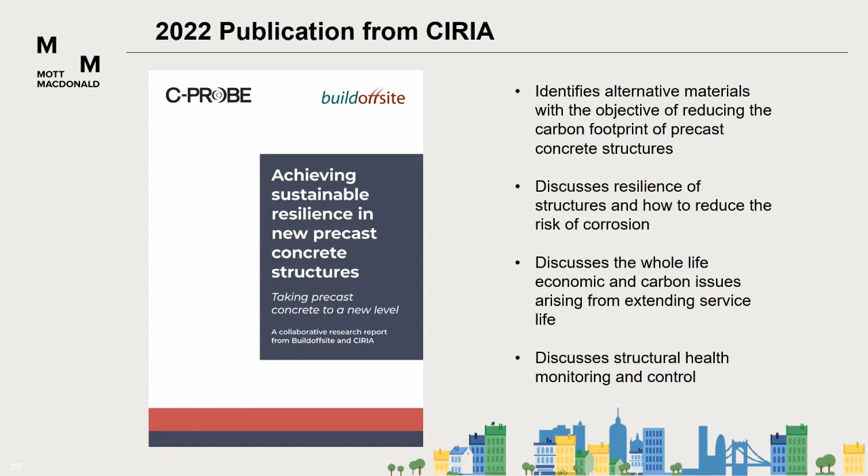Firstly, a bit about embodied carbon. A lot of people talk about it. There's carbon figures bandied around all over the place, but it can sometimes be missed as to what it actually is. So when you make something, anything at all, you use energy, and the more complicated it is to make, the more energy you use.

Most of that energy comes from burning fossil fuels. When you burn fossil fuels, you release carbon dioxide and water. The fossil fuel itself is a long-term carbon store. So all this carbon dioxide is extra carbon dioxide that's reintroduced back from dinosaur times when it was nicely locked away as oil and gas.

We then make something, it's processed and transported to where it's going to be used. That uses more carbon dioxide. In addition to the fuel that we use, the tricky thing about cement, Portland cement, is we burn limestone, and that physically releases carbon dioxide as part of the process. So that's one of the reasons cement is seen as positively evil from the point of view of greenhouse gases.

As an example, if you take a linear metre long column that's 250 by 250, including the reinforcement, 40 years ago - well, actually probably 60 years ago - we'd be using straight ordinary Portland cement mixes, and that would be 77 kilograms of carbon dioxide equivalent per linear metre of column.

If we take 30% of the cement and replace it with pulverised fly ash, a waste industrial product from burning coal, we got that down to 56 kilograms. And if we use 70% ground granulated blast furnace slag, we get that down to 35 kilograms.

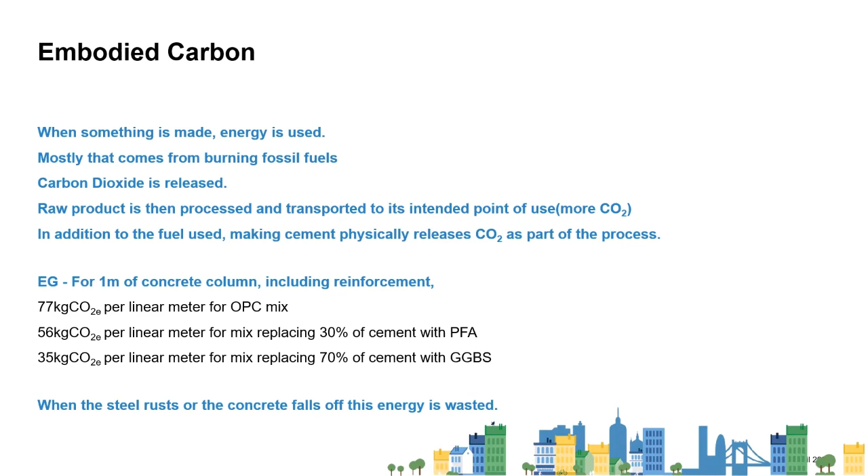The other problem with corrosion is that it's a perfectly natural phenomenon. Steel doesn't want to be steel. We stuck a lot of energy in it to make it steel, and it wants to turn back to rust. When it rusts, concrete falls off. We also lose structural properties - we lose section. So as well as the bits of concrete falling on people, we're losing structural capacity.

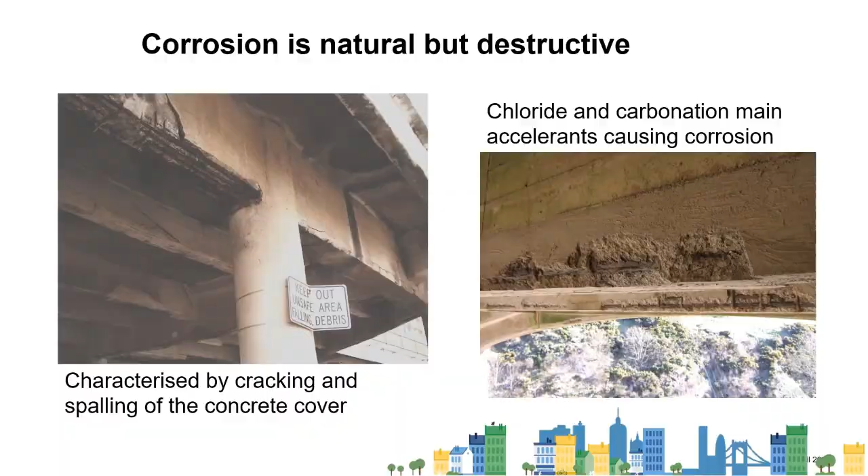As Kat mentioned, 7 to 8% of carbon dioxide emissions in the world are the result of Portland cement production. Now that's an appalling amount, but if you look at the actual use of cement by mass, 52% of the stuff used in the world is concrete. So it's not so much that cement is bad, it's just we're building a lot of stuff.

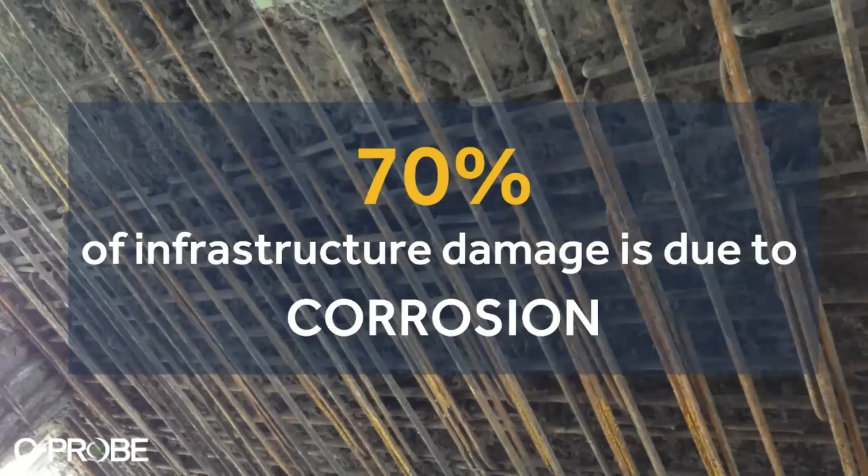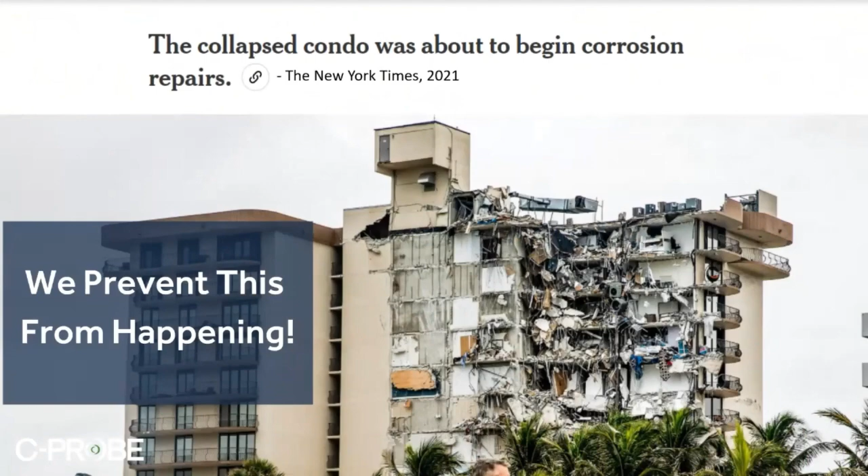70% of the damage on infrastructure is due to corrosion. And sometimes, if you let it corrode and don't keep an eye on it, really bad things happen. This is the condo that collapsed in Miami in 2021. Repairs are about to happen. It's all very well sitting there pointing and going, yeah, but that was America, we're different over here. No, we have collapses over here too, due to corrosion.

So we need to make durability better. The conventional approach to making more durable structures so that we don't waste all the energy we've invested is to stick more cover onto the concrete or more cement into it. Both of those just mean more carbon dioxide, and it's been the historical approach that's been undertaken, and that has led to a significant industry repairing it. So it's not entirely perfectly reliable.

One of the things we do to steel all the time to stop it rusting is coat it, but we tend not to do it to concrete. We can work out the figures for coating concrete - it's about 2.7 kilograms of carbon dioxide per square metre per application, and we might need to do it again and again. The difference with concrete versus steel is when the coating falls off steel, it starts corroding instantly. With concrete, when the coating falls off, you've still got a protective barrier of concrete, so you can plan your maintenance based on what's actually happening.

Graham's going to talk in more detail about cathodic protection. There's a range of options. We can either make it easier to cathodically protect in the future - join all the steel together and make sure it's electrically continuous. That means we're going to have no additional CO2 until it's needed.

We can include anodes and monitoring so we're watching to see when the corrosion started, and we can turn it on when the corrosion started. That's about 3 kilograms of carbon dioxide per square metre, plus the power supply when we need it. But these are all extra low voltage, tiny current systems. Or we can stick cathodic protection on at day one, which uses lower current to prevent corrosion rather than to stop it once it's started.

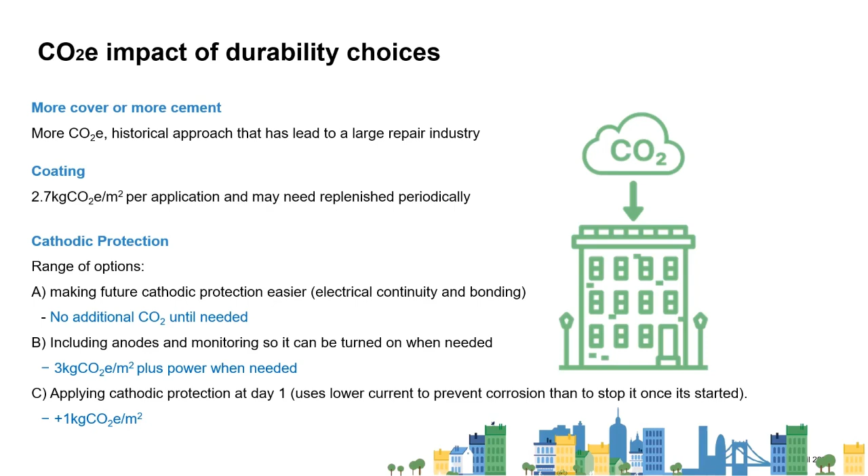As an alternative to achieving durability, the alternative to using Portland cement is the use of alkali activated cementitious materials, and Graham's going to take it over from here.

The guide does focus a little on alkali activated cementitious materials as an option for low carbon cement binders. That doesn't mean to say other efforts aren't out there trying to lower that carbon, as Chris outlined. But the use of AACMs uses an awful lot of the secondary cementitious materials. What I want to focus on here is how we've used these materials to focus in on the resilience aspects of construction.

What I would add is the evolution of this PAS 8820 in 2016 has seen the formation of the Association of Alkali Activated Cementitious Materials, or A3CM, which I'm a founding director of. That organisation is currently focused on drafting engineering specifications for using these materials, which we hope to distribute to the industry next year.

One case study - this is actually in restoration, not in precast, but the principle is the same. As Chris alluded to, if we allow steel to corrode, we're losing all the embodied carbon that's within that structure if it reaches demolition.

And this case study is a current job of C-Probe's in New York, which we're doing in conjunction with Mott MacDonald. It is made up of 3 podiums to support a parking structure, some apartments, a multiplex cinema, etc. And it was allowed to degrade over time, not probably by choice, but just by budget.

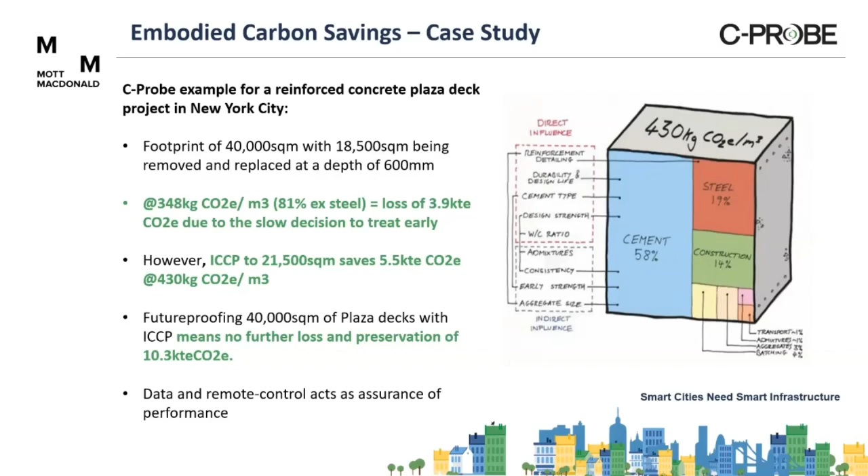And the good thing about cathodic protection systems is you get data. It's part of the ISO 12696, which is now the 2022 version. And we can design in these systems in order to be remotely controlled, fed from that decision making from the data that's achieved. So performance is assured into the future for decades to come.

So if you like, it touches all sorts of buzzwords at the moment, prop tech and infratech and insurtech, etc. With clean tech technology, if you're taking industrial wastes, repackaging them as a clever, smart binder in order to be able to pass current through it, we can automate, streamline, and take the building, or the structure, or piece of infrastructure, and build that to last with some resilience into the future.

The upshot of this, and these are not C-Probe's figures, these come from the NACE Impact Report in 2016, the use of control systems saved approximately about 3.4% of GDP of a Western industrialized nation. So it's not insignificant. To give that some US terminology, Congress has just put out $1.2 trillion worth of infrastructure spend, and they can actually save $850 billion per annum by adopting control systems. So not surprisingly, in July last year, Congress announced a $200 billion spend just on control systems of infrastructure. So the market has just improved.

And this actually has an ESG impact. Kat alluded to this earlier on too. There are big gains in the net zero landscape for ESG impact. And in the case of adding cathodic protection from day one, then environmentally we're repurposing all these industrial wastes in order to produce components that allow us to integrate into the structure and take control from day one. So environmentally a very useful thing to do.

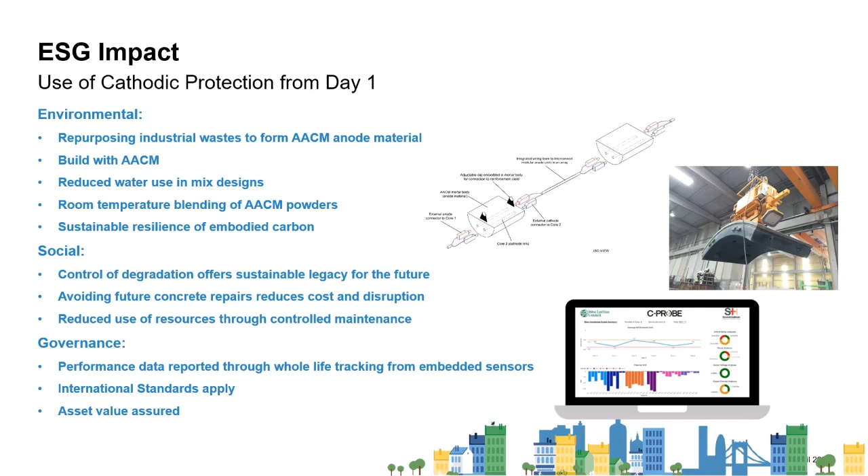And in the governance sense, we're applying international standards, producing performance data, reporting that, tracking that on embedded sensors and remotely. Really the good news for owners and for the taxpayer is that asset value is assured by taking that control. Now, we actually have a little video of the modular anode unit, which is a componentized version of an anode that can be inserted straight into, or connected straight into, the rebar during construction, allowing us to control from day one.

So let me just run this.

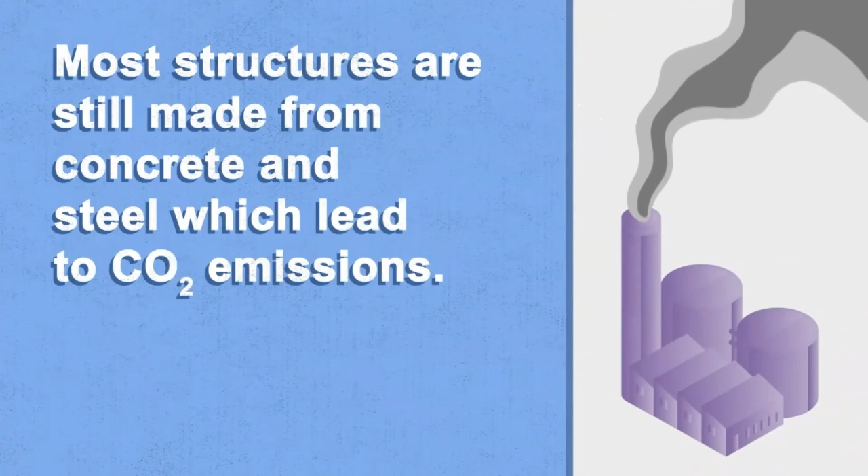Most structures are still made from concrete and steel, which leads to CO2 emissions. Climate change is currently a huge threat to the built environment, causing high temperatures which accelerate carbonation and corrosion to reinforced concrete infrastructure. C-Probe is addressing the challenges of raising the resilience of reinforced concrete with its new low-carbon technology, the LOSEM Modular Anode Unit.

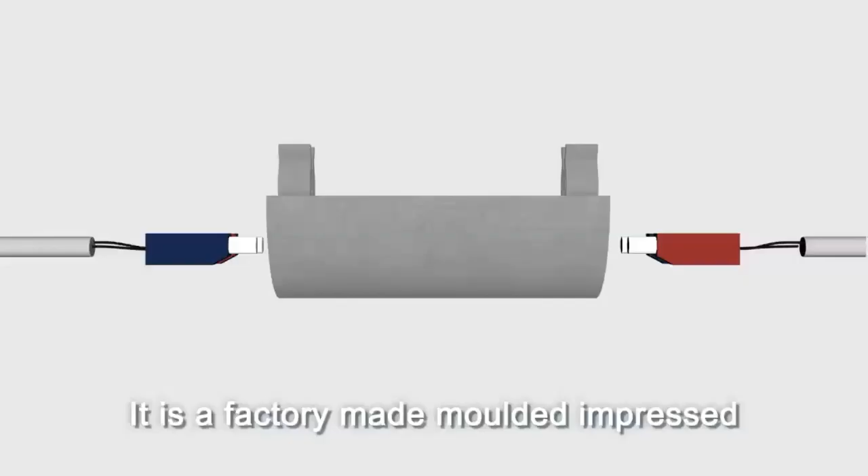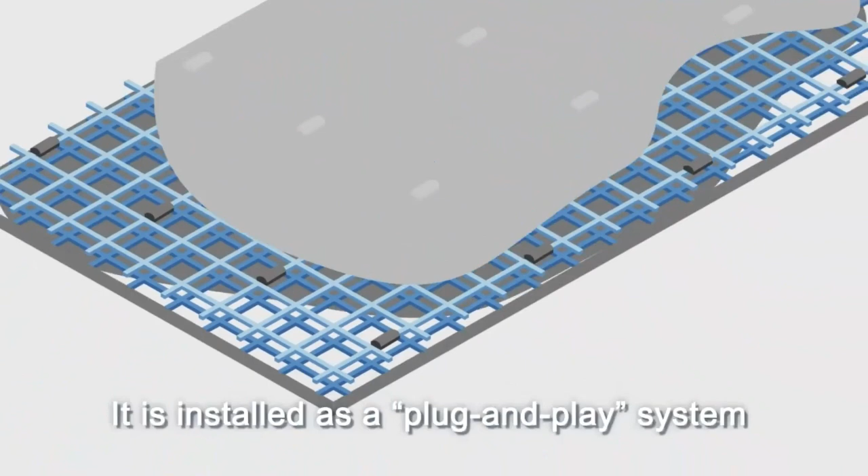What is the LOSEM Modular Anode Unit, or MAU? It's a factory-made, moulded, impressed current cathodic protection component that can be attached in an array directly to steel reinforcement prior to pouring the concrete. It is installed as a plug-and-play system with tailored current densities providing long-term sustainable structural resilience and control over steel corrosion.

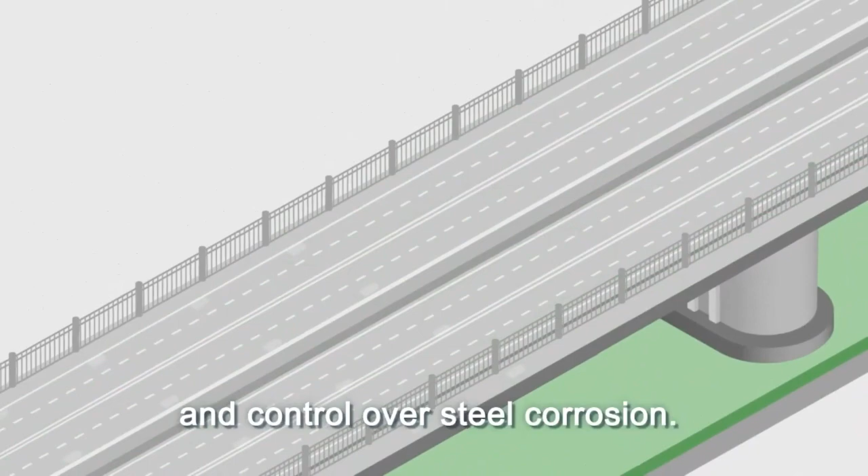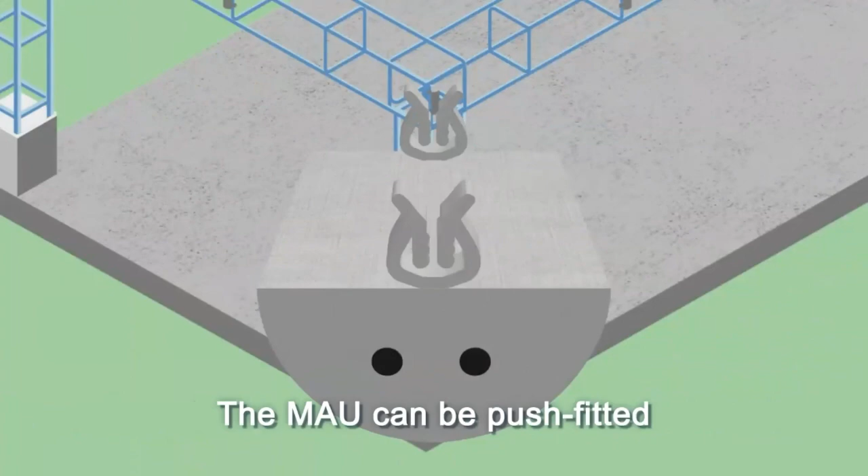Easy to install, for all new construction where reinforcement steel needs protection from future environmental impact. The MAU can be push-fitted to a range of steel diameters during steel construction. Plug and play.

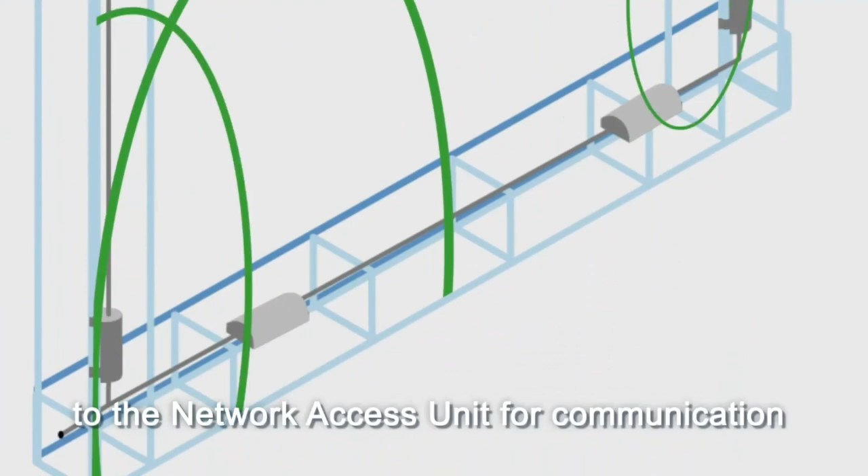Wiring between the MAU is also modular and simplifies the electrical installation. This wiring is routed to zonal enclosures, with the network routed between enclosures to the network access unit for communication and control of protection current. Routing to the interconnecting modular wiring can be made at the precast factory in box-outs and completed after delivery to site, minimizing time to completion of the installation.

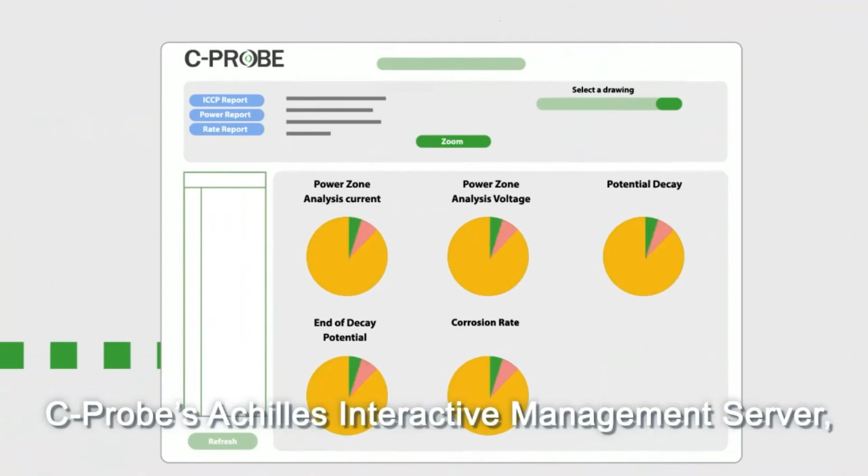Protection from day one. When coupled with C-Probe's sustainable resilience management networks, the MAU is easily monitored and remotely controlled online. C-Probe's Achilles Interactive Management Server, or AIMS, takes the data and offers clear reporting for your structure's performance now and into the future, offering peace of mind and added value from controlling the service life for its whole life.

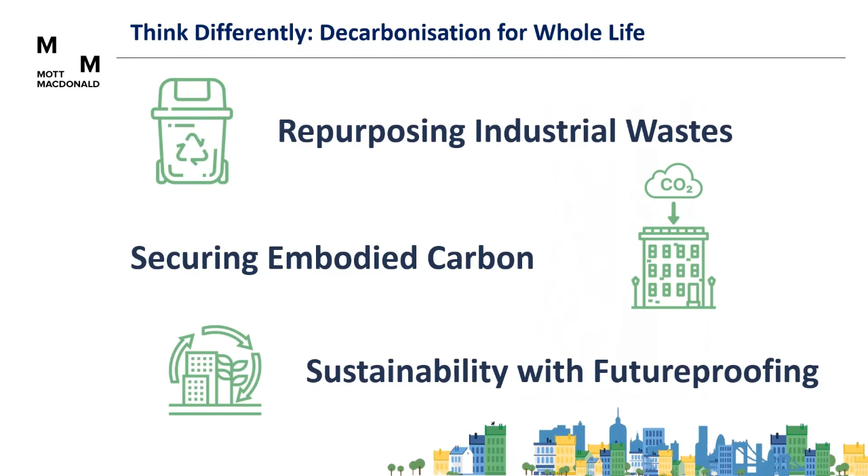So I think our closing message really is to think a little differently in decarbonising for the whole life of structures. The Sustainable Resilience document is the first step to try to inform on that path, repurposing industrial waste, securing embodied carbon, and providing not just sustainability, but future-proofing structures into the future to make them resilient. And thank you for your time.

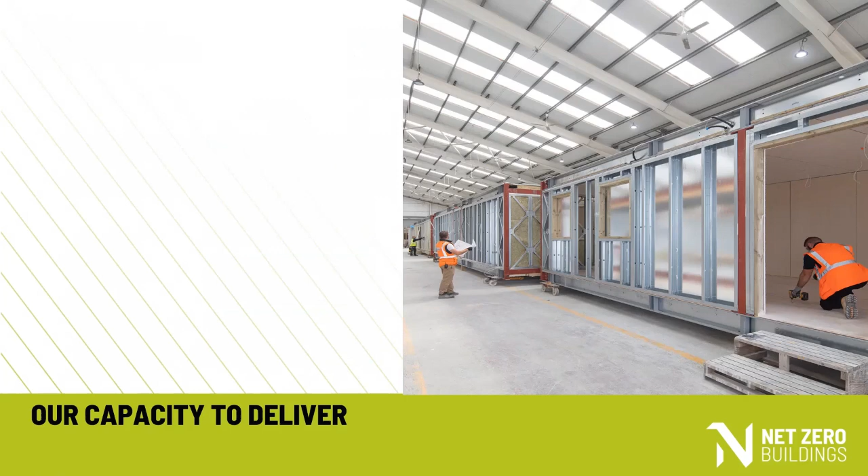Our capacity to deliver, we have two factories, one in Yorkshire, one down in Cambridge. In total, 10,500 square meters of purpose-built manufacturing facilities, the largest being in Brandesburton in Yorkshire, which consists of 5 factories on a 24-acre site.

Combined, we can manufacture in excess of 100,000 square meters of building in a single shift. During the recent COVID pandemic, we were able to increase to 3 shifts, which is a day shift, evening shift, and weekend shift, which increased that number significantly. We turn over about £130 million per year across the two businesses, and at the heart of what we do is quality, sustainability, and safety.

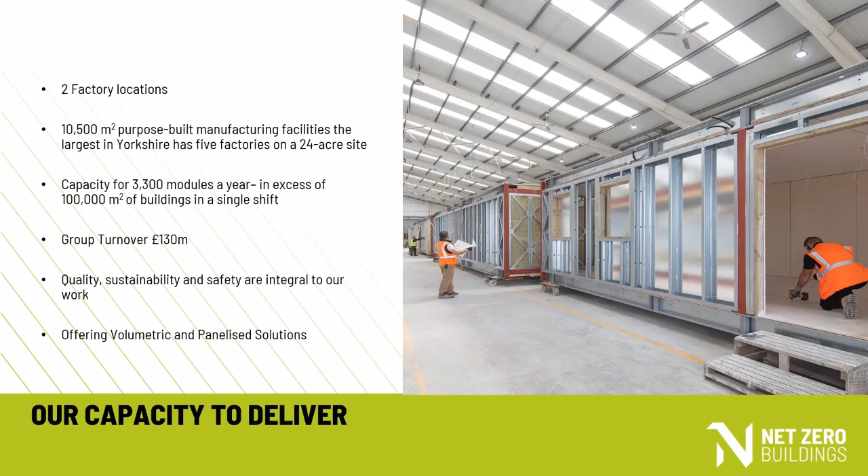Again, we offer volumetric and panelized systems. A volumetric system is a steel frame box, which can achieve up to in excess of 85% PMV, and a panelized system is a closed panel SIP system used as a wraparound. So volumetric tends to be a larger fit out, whereas the panel system tends to be more of a traditional focus on site. So I work for the sister company Net Zero Buildings.

Who are we and what we do? Well, we offer a turnkey solution above ground, and we manufacture bespoke systems. We take projects from RIBA stage 0 all the way through to handover. As I say, bespoke systems and a product offering zero carbon in construction and operation, using lean manufacturing, high quality performance and efficiency. We work with independent architects throughout the UK and consultants to achieve the best possible project solution for our clients. Again, sustainability, zero carbon is at the heart of everything we do.

We truly believe that we can all achieve zero carbon.

So just moving on to ESG and a little bit of a recap. ESG, environment, social and governance, represents a set of standards for a company to be socially and ethically conscious. Environmentally, how a company impacts or supports the world it operates in. Socially, how we interact with employees, suppliers, customers, and the communities around us. And how we govern our business in an ethical and inclusive way.

For Net Zero Buildings and Premier Modular, we wanted to set out a purpose, a reason for achieving ESG. We came up with this purpose: to enable a better tomorrow every day for generations to come. This articulates how, as a group, we make it possible for our people, customers, and communities to thrive.

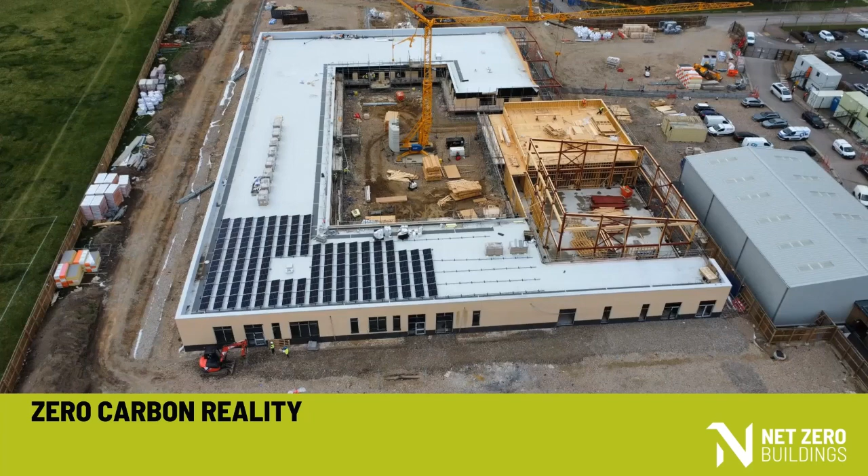In order to achieve these iconic buildings, we had to understand where our baseline sat. So we took our standard building and, working with AESG, we came up with a series of building envelope criteria to achieve a zero carbon building model. This is backed up with energy efficient M&E and renewables.

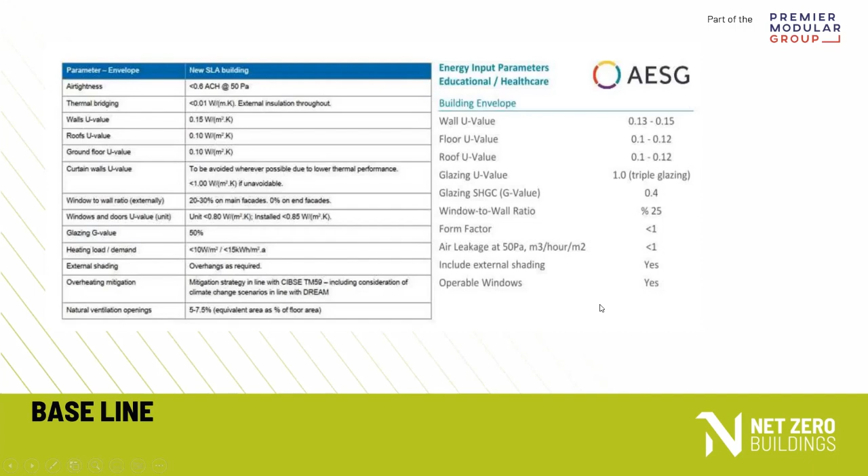Once we had this, we could then deliver this iconic building. This is the TEDI-London building in London. It's part of the Canada Water Master Plan and is actually a temporary building. While the steel structure itself has a 60-year design life, the building we delivered for TEDI-London has a short life requirement of 7 years.

It's growable - we can expand on this building and make it larger. And it's flexible to allow delivery in-house of occupants, generating social value and community. But importantly, phase 1 was completed in London, and its first cohort took occupation in September '21.

Part of the Canada Water Master Plan is to redevelop this site, and this building will no longer be used. So as a hire building, we are able to deconstruct this building and move it to a new location on site as part of the master plan, reconstruct it, and then have new people occupy the building.

Key to the client's requirement was circularity. At the end of the 7-year master plan, when the whole area has been developed, this building will be removed, returned to our factory at Brandesburton, and will go back into our hire fleet to be used as classrooms, wards, residential - whatever is required. We feel this is true circularity of use, offered by our hire division.

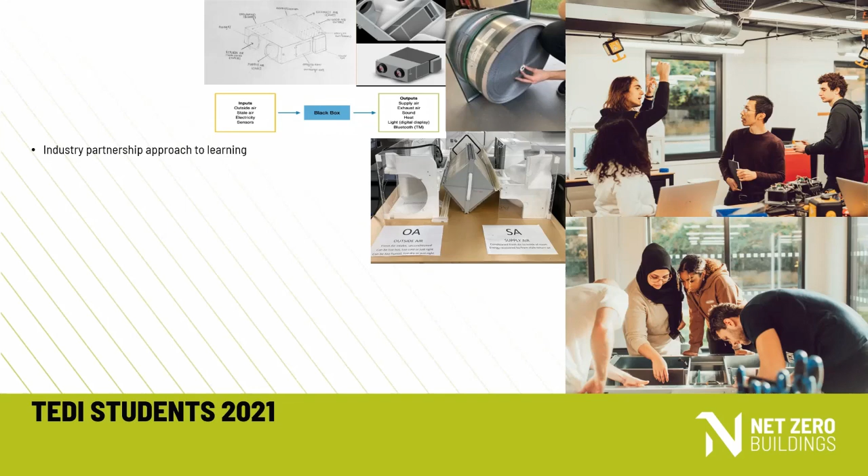Also unique to this process was the involvement of the students. Our supply chain worked with the students on the equipment used within the building. The students researched and studied the M&E and zero carbon elements used within the building and put it into their thesis and studies to create a smart city design, using live data from the BMS in the building, which they're now adding to their coursework in a live environment.

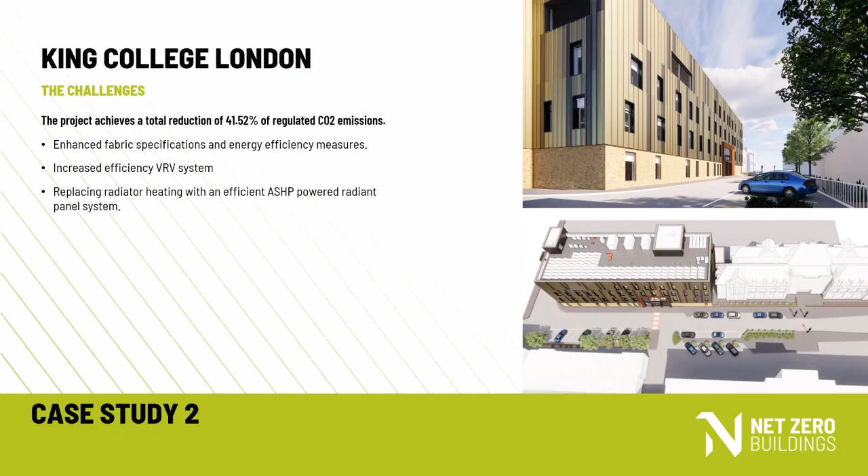A second case study is King's College London. The challenge here was to achieve a reduction in CO2 emissions. Again, we used a fabric first approach: increased efficiency of VRV or VRF systems, replacing radiators with air source heat pumps, heat recovery added to mechanical ventilation spaces, domestic hot water provided by a bivalent system, and again high LED and PV.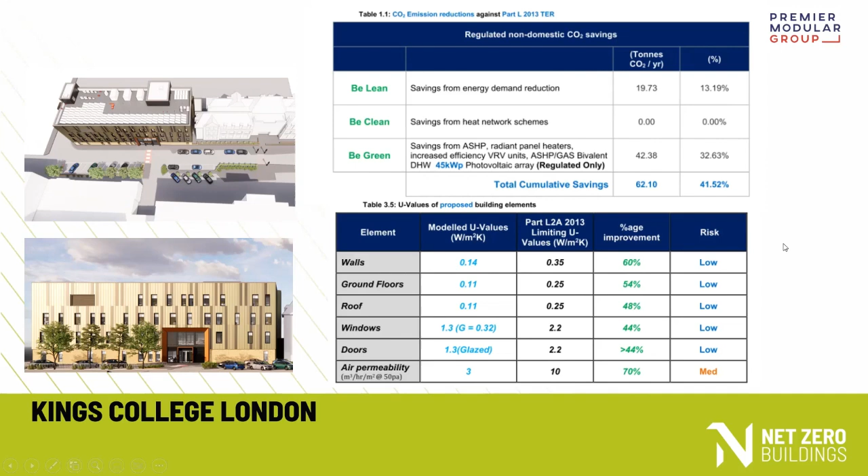Mindful of the time, and I really appreciate all of your time, there are 2 more case studies in my presentation which I won't go through today, but they show how we achieved zero carbon in construction and operation on site. I'd welcome any further questions at the end of the presentation. But Kat, back over to yourself, and thanks for your time.

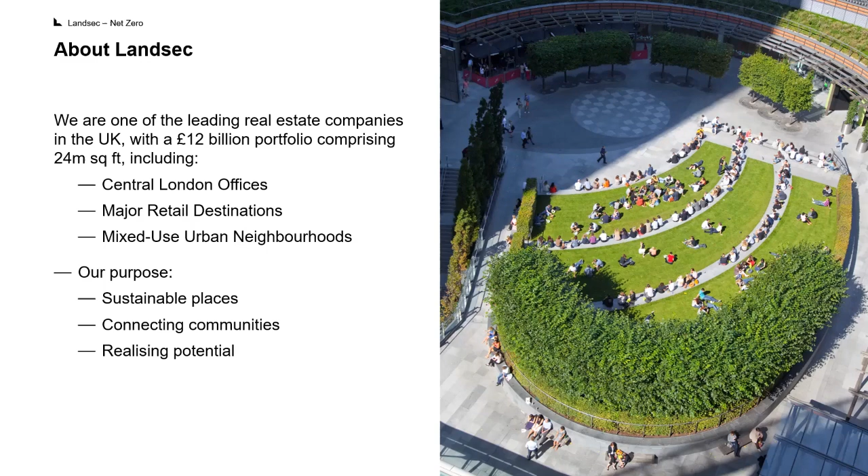We're one of the UK's leading real estate companies. Our portfolio is in the order of about 12 billion. I think with the stock market recently it might have gone down a little bit from that in the recent valuations. But essentially 24 million square feet across the UK: central London offices, some major retail destinations, and some mixed-use urban neighbourhoods.

Our sustainability focus is on a vision around 3 words: build well, live well, act well. Reducing operational carbon emissions on our portfolio, and on new construction and major refurbishment, reducing both its operational carbon in use going forward and its embodied carbon, to ensure they don't add further to our existing portfolio's carbon footprint. With that in mind, we developed a net zero transition investment plan to go back into our existing buildings to decarbonise them over the next few years.

We've led on climate resilience within the business because it's a strategic priority for us. It ensures our business remains relevant and creates value over the long term. Obviously there are risks to the retail sector around the transition period, and there are policy and legal measures in place we have to comply with, including minimum energy efficiency standards. Performance-based energy ratings schemes are being considered by the government at the moment. We have climate disclosure using the TCFD process for all UK listed companies, as we're a FTSE 100 company. And there's always the potential that carbon will be taxed in the future.

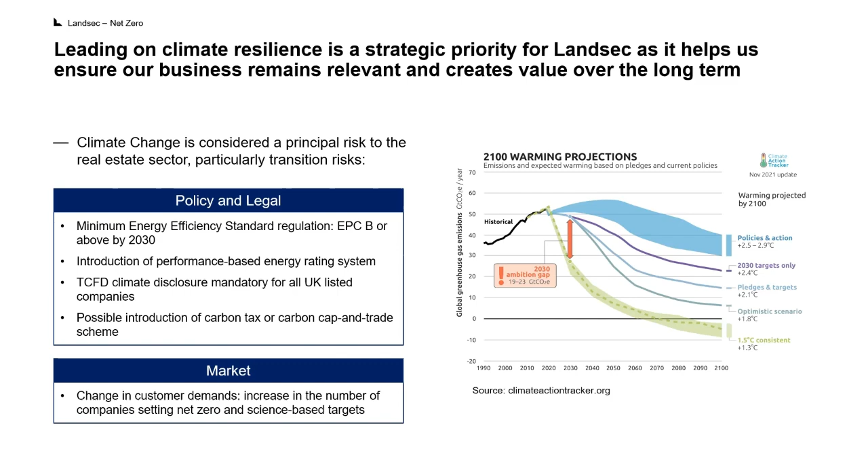It's also important from our position in the market to ensure we're meeting the aspirations of our customers in terms of setting net zero and science-based targets. In fact, we were the first company to do that in the real estate sector.

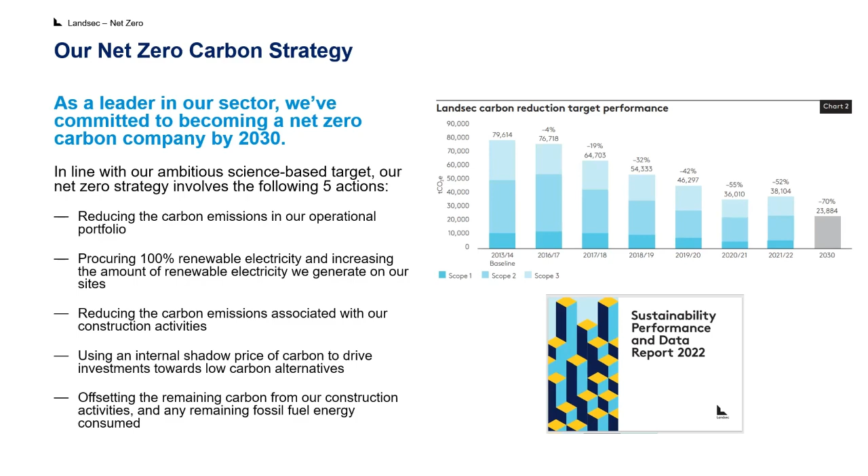Our strategy is around 5 steps really: reducing the operational carbon in our portfolio, procuring 100% renewable electricity and increasing the amount of renewable electricity we generate on our sites, reducing carbon emissions associated with construction, using an internal shadow price of carbon to help inform our decision making around low carbon alternatives, and finally offsetting any remaining carbon that we can't deal with in those other ways. But that's always the last resort, and if we do that, we'll also use gold standard offsets.

In terms of new developments, as we've got a large portfolio, we have a big challenge, common to everyone: estimates suggest something like 80% of the built environment we have now will still be with us in 2050, when the government's target for the UK is to be net zero carbon. Our own target is to be net zero carbon by 2030, which is quite ambitious, but it involves going through our existing portfolio decarbonising operational emissions, and then making sure our new developments are net zero carbon, both in operation and in construction.

Two examples of that: one I'm going to talk about today is the Forge at Southwark, an innovation-led project I've been involved with, using modern methods of construction to minimise the carbon footprint and to transition the building to an all-electric solution where we can secure renewable electrical energy supplies to make it net zero. Similarly with our Timber Square development in Southwark, another building that's probably going to be the next one off the blocks.

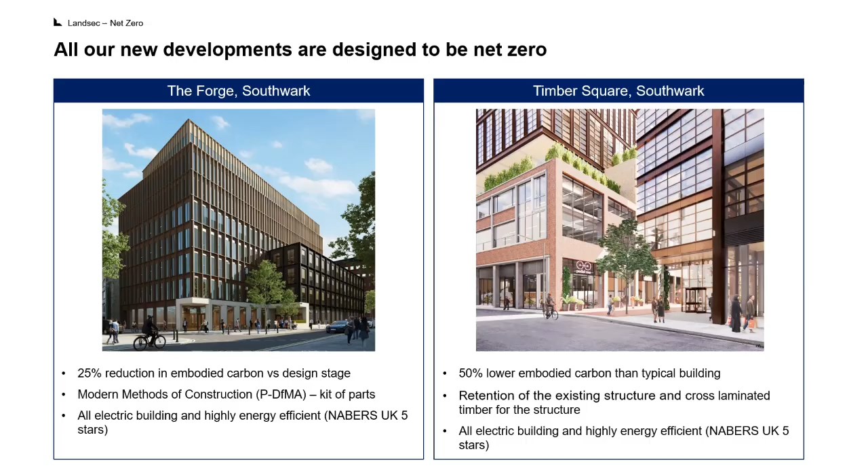So the Forge. First, before you can say you've achieved a net zero carbon building, you need to really understand what framework or benchmark you're actually comparing against. There are at the moment 4, 5, 6 different versions of what it means to be net zero carbon.

The Forge development is a commercial office building, and probably the most advanced definition currently is by the UK Green Building Council. They set up a framework which is all about minimising the energy consumption in a building to minimise its operational emissions as far as possible, moving that to renewable energy supply, doing the same with any carbon used in the construction process, minimising it as far as you can, but then using offsets to make the building net zero carbon. The operational energy must align with the Paris proof targets, and at the moment they're still defining energy benchmarks for other building typologies, but fortunately there was one in place for offices.

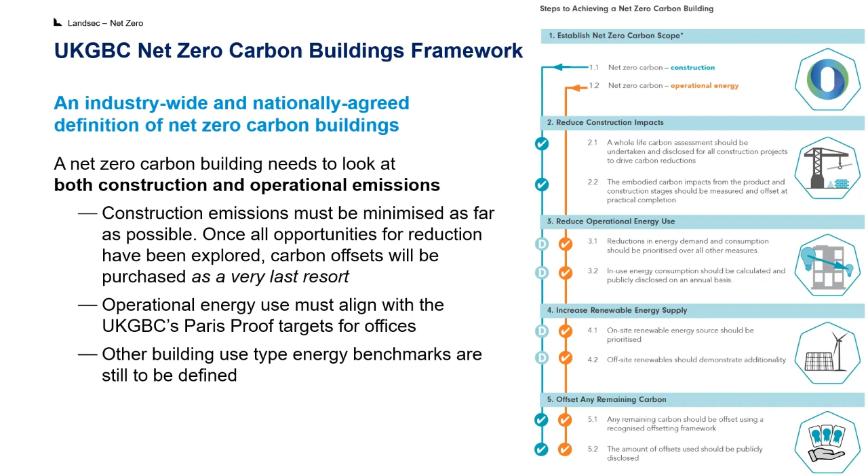I talked about these many different versions of the definition. A lot of the people who created those definitions have now come together to work on a net zero carbon building standard, which I'm actually on one of the working groups for, to try and align all the different definitions into one that we can all use, which I think will be a great step forward.

So the Forge was the first net zero carbon development that met that UK Green Building Council framework definition at the design stage. We did a whole life carbon assessment at a very early stage and have continuously updated that through the process. Any remaining embodied carbon emissions have now been offset by credits, and we've moved the building to an all-electric building using air source heat pumps for heating and cooling, water-to-water heat pumps for the main hot water generation, and some electrical generation of hot water to complete that.

We've got some solar PV on site, and to ensure we meet the energy performance efficiency levels needed, we've used the design for performance process, which involves actually looking at the performance and use of the building using sophisticated modelling tools, a process that was developed first in Australia called NABERS, and there's now been a UK version of that started by the Better Buildings Partnership in conjunction with BRE.

So the buildings, there's 2 office buildings on the site. The one you can see in the picture there is the larger of the 2. There's another one just behind that.

In terms of thinking about buildings, particularly from a constructional perspective, which I think is the focus today with Buildoffsite, it starts with the extraction of raw materials. Energy is used to create raw materials into building materials. The process of building obviously takes energy before you even get to the final constructed built environment asset. And then there's further investment over the life as those buildings are fitted out and modified, which all involve additional embodied carbon and material use over the life cycle. So it's something we really have to focus on going forward. I think most of the focus to date has been on operational carbon, but going forward, embodied carbon is going to be increasingly important.

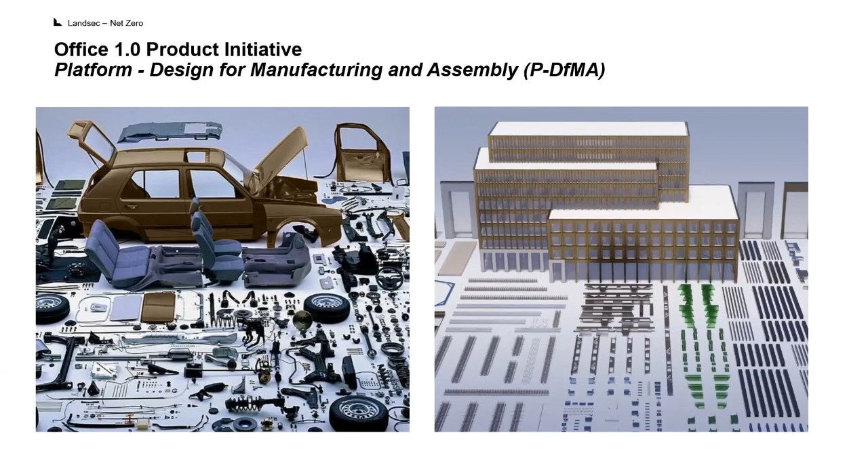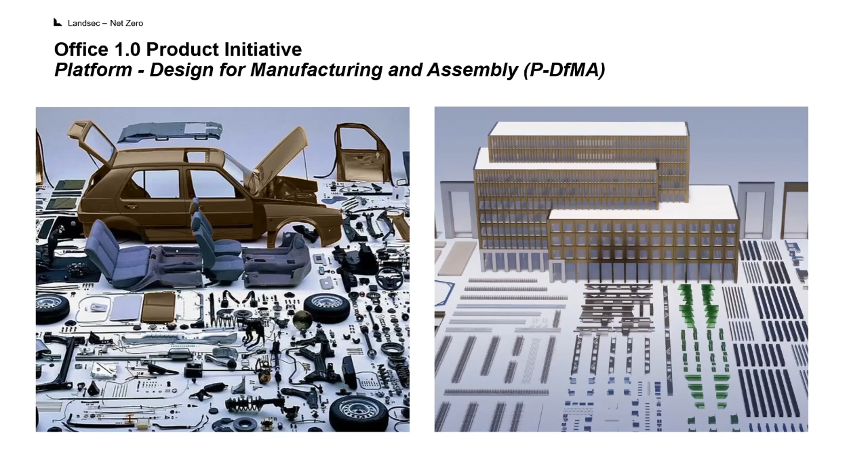You can see in this example here, obviously the car industry radically improved its performance by breaking down their product into lots of individual components, making sure that they're all optimized and brought them together in a systematic way. And the idea for using design for manufacturing assembly, which is what PDFMA stands for, and a platform solution - something that can be used many times by different people - is the way forward, we think, or one of the ways forward at least.

This is a video that I'm just going to play here that shows some of the research work we did.

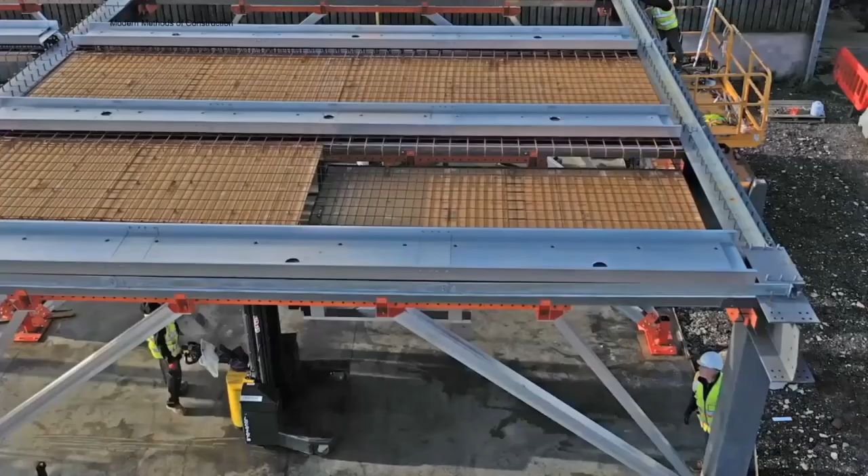So, good drums there for the time in the morning.

Essentially, the idea there was to create a platform solution of the structure, which is the frame for the building. Most products start with a framework of some form, whether it's a chassis for a car or a back plate for an electronic product, on which then you can put the components of the building. For a building, it's all about the structural frame, the superstructure of the building in terms of providing that chassis, if you like.

The real intention here is to build that frame as accurately as possible so that other manufactured products can fit onto it on site, as opposed to the traditional method of construction that requires a lot of on-site modification and in turn produces a lot of waste and inefficiency.

We estimated that it was almost a 20% reduction in the embodied carbon of the building just on the structural elements that we changed. We also focused on other elements of the construction components used to further reduce that, and we're at 25% plus at the moment, just waiting for the final assessments to come through before we can absolutely say what we managed to achieve.

A major element was that focus on the structural piece, which enabled us, compared to a traditional structural solution using a steel frame, to reduce the amount of steelwork by about 18.5%. And by using a ribbed concrete slab in a hybrid steel concrete structure, we were able to reduce the amount of concrete by about 13% as well.

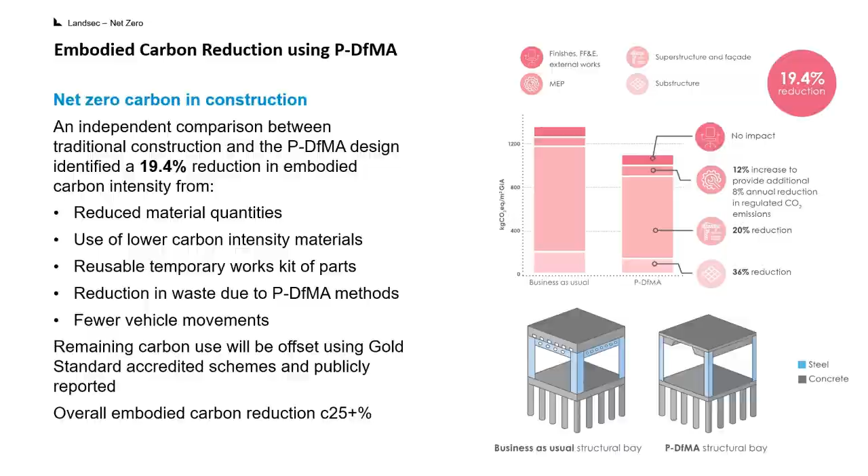This enabled us to get access to the level below and to ensure that we could use that material time and time again to construct each slab.

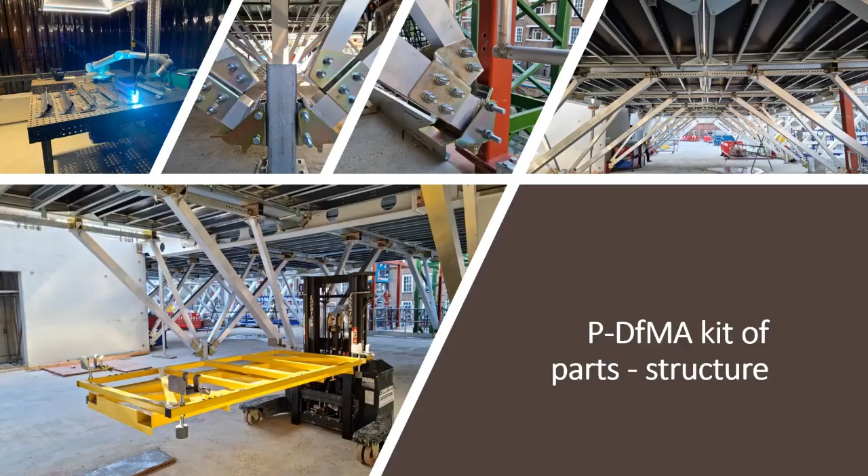We didn't just stop with the structural piece. The big focus was on the three big elements of the building: the M&E, services, and the cladding. Cladding is the unitized cladding, already a very highly manufactured product, but often the lack of an accurate frame makes it very difficult to achieve the time and efficiency savings normally associated with that sort of approach, because a structure is not built to the accuracy really needed.

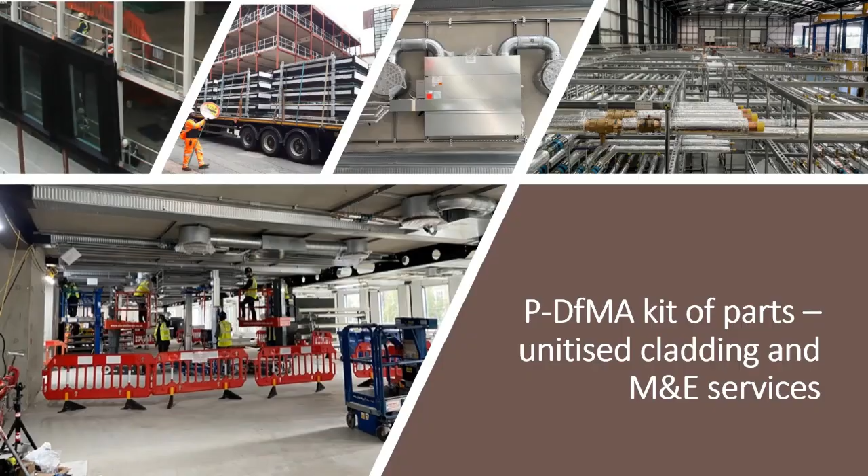All the M&E for the main mechanical services that went onto the office floors was constructed off-site, which is unusual. You often see risers and plant rooms created off-site, but not usually off-site manufacture of the Cat A installations. Here we could do that because it was coordinated with the accurate superstructure, including fixings embedded in the concrete, saving a lot of hand drilling on site. About 23,500 fixings were provided and integrated with those services. We achieved that by bringing on board subcontractors with a supply design component in their package early, at stage 3 to stage 4, to work alongside our designers.

In terms of reducing operational carbon, we used the NABERS design for performance rating approach, and the building is forecast to achieve above 5 stars, which was the level needed to meet the UK Green Building Council framework.

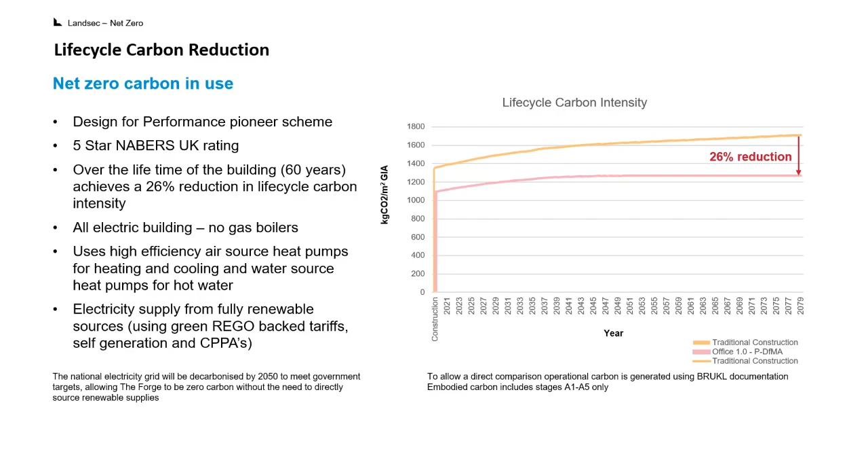This building is very much in the public eye because of the approach using DFMA, and a lot of people have toured the building and seen the work we've done there. As I said, it doesn't stop with new projects — they need to be net zero carbon so they don't add to the existing challenge, but we can't just leave the buildings we already have as they are.

So moving forward, we're investing in them with a £135 million investment plan, delivered between now and 2030, enabling us to move all our buildings to an EPC rating of B. Over 40% of our buildings are already at B or above, so we have a good start, but there's still work to do.

To reduce emissions across the existing portfolio, we're going to improve BMS performance using AI technology, invest in air source heat pumps to remove gas burning on site, deploy solar PV, particularly across our retail centres where we have large roof areas, and engage with customers to ensure they operate buildings as intended and work with us to drive down energy use wherever possible.

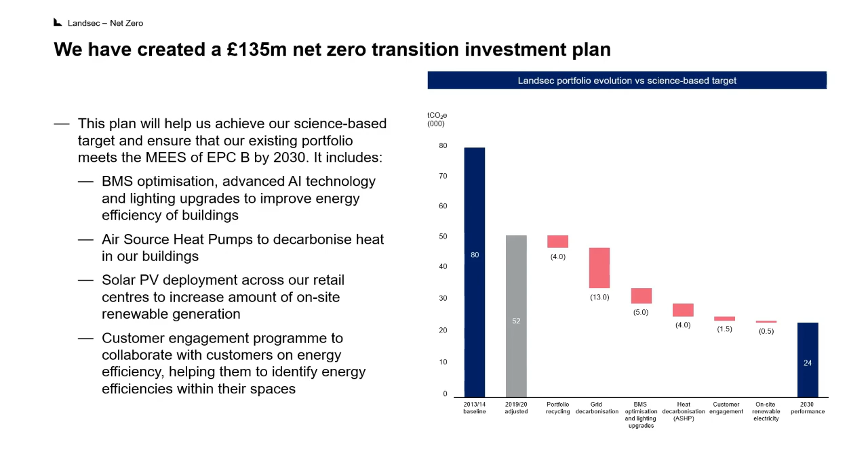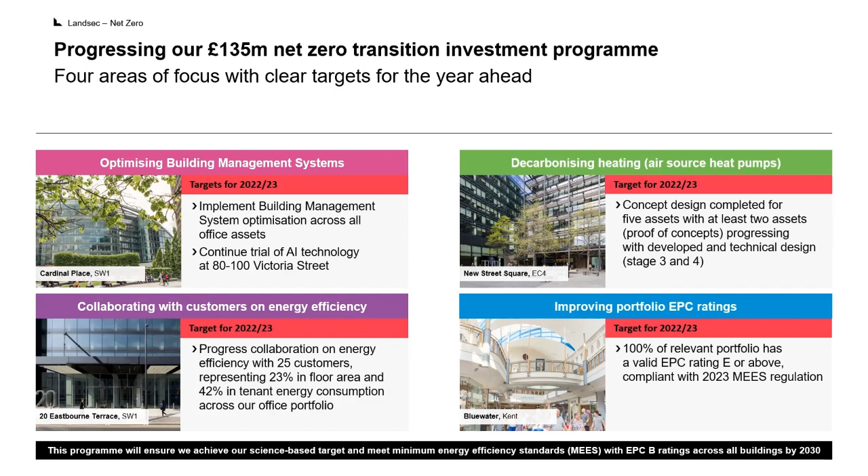We're already making progress on those things — optimisation of the BMS, collaboration with customers, decarbonising with air source heat pumps, with the first projects going on site later this year, and a major investment to improve EPC ratings right across the portfolio.

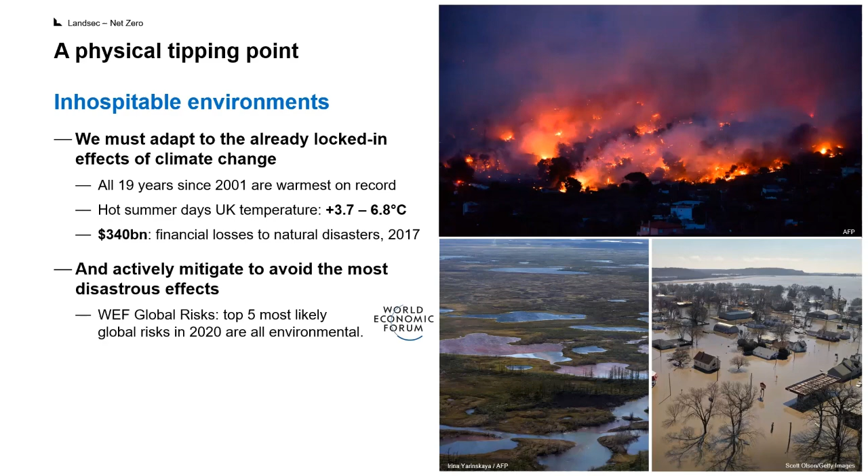So we can't not do the sort of things we've been talking about today. Our ambition is to be a leader in this space — we were the first property company to set a science-based target, since updated in line with the Paris COP, from originally a 2-degree target to 1.5 degrees, which is where we're currently targeting with our investments going forward.

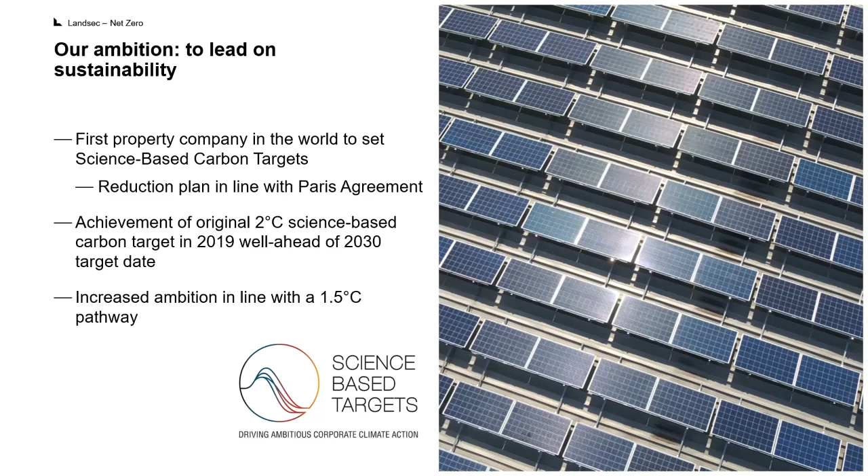There are benefits of net zero carbon buildings. Hopefully that aligns with our customers' ESG ambitions, helping us win the race to get customers into our buildings. It's always good to add value to the business, avoiding long-term problems around asset value and liquidity, and avoiding premature obsolescence and stranded asset risks. We want to move electricity supply to renewable energy, avoid dependence on fossil fuel, and become an engaged partner for our customers.

In summary, we're committed to being a net zero carbon company by 2030, a strategy based around climate science to identify a pathway, and a sustainability leadership position recognised beyond our peer group, not just in the property industry. Sustainability is important for us to remain relevant and deliver business value into the long term — it's important to be a sustainable company as well as delivering sustainable assets for our customers in the built environment. Hopefully the lessons learned from the Forge will help us take that forward into our new projects.

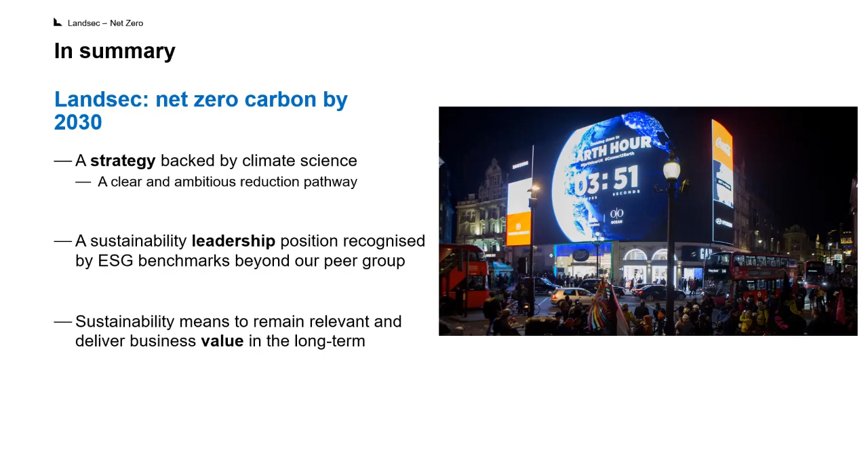Thank you very much, Kat. That's great. I think I've got control of the system now, haven't I? So I should just be able to move on with the slide. There we go. Okay. Yes, thank you very much.

It's been two really good presentations there. I'm conscious that we want to get some questions in because I see the questions popping up on the screen. So I've kind of slightly shortened the title of our presentation: Can Offsite help us to meet our net zero ambitions? I think that's what we're really talking about today. When we look at those ambitions...

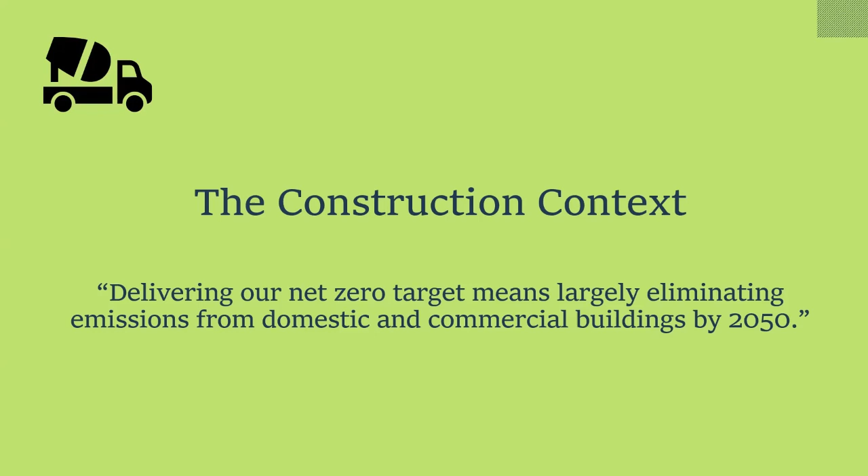We're looking at those ambitions. In the construction context, delivering our net zero targets means largely eliminating emissions from domestic and commercial buildings by 2050. That's a big challenge for us. I want to be talking this morning about what that means. It means looking at the whole life carbon of our buildings.

And when we're looking at whole life carbon of our buildings, work that's been done by RICS in this area is really useful. We need to be looking at the embodied carbon, which many people have been talking about on the call today, but we also need to be looking at the operational carbon. I believe that offsite has a role to play in both of those areas, but I think we need to do a lot more as a sector or subsector within the industry to show and evidence what we're actually doing, both for operational carbon emissions to reduce them and embodied carbon emissions.

You can see there the difference between office, warehouse and residential, but very roughly looking at around 70% is embodied carbon emissions, obviously going to get less over time. And we look at those operational carbon emissions as well. What can we do through the manufacturing process to help to ensure a reduction in operational carbon emissions going forward? That's something I think we need to be focusing on, as well as the embodied carbon.

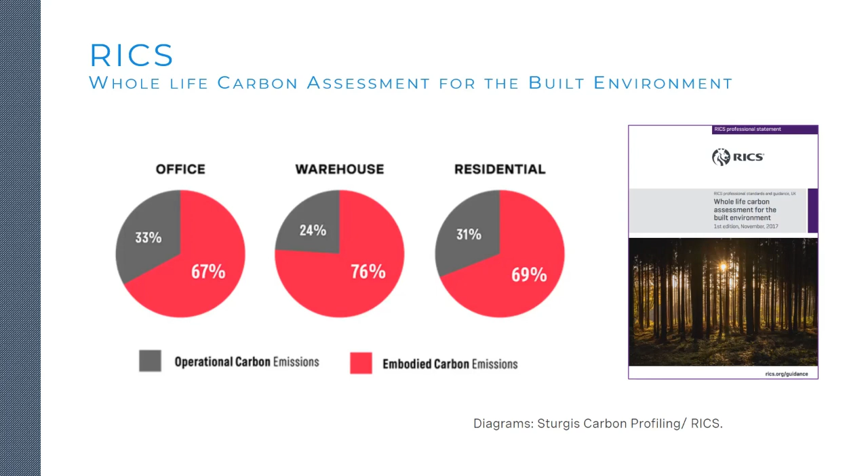And you heard from Ian speaking then how important the operation of the building going forward is for their customers and for themselves as an organisation as well. So we talked in the title about lots of targets that the industry was setting.

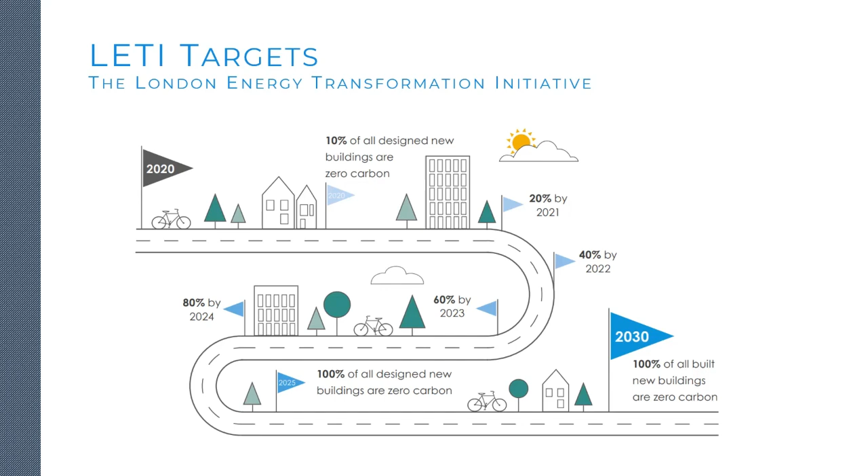We've seen targets that others have set already in the various case studies. Some of you will be familiar with the London Energy Transformation Initiative, started off back in 2020, saying that by 2030, 100% of all new buildings will be carbon zero, which is pretty good going. Some of our speakers have also alluded to the fact of what is a net zero carbon building, and the work done by UK Green Building Council is very informative in this area and helps us to really understand it.

But we're moving on from there in terms of trying to understand what net zero, rather than net zero carbon buildings, means going forward. You can see all those organisations, LETI, UKGBC, RICS, Carbon Trust and others, CIBSE, are all coming together to say we really need a standard which actually sets out what we mean by net zero carbon buildings. So they've started that consultation process. If you haven't already engaged in that, I think you've got a few days to get involved before that closes.

From our own organisation's point of view, we've done quite a lot of work trying to understand whole life carbon in construction, and this is some work we've done looking at Barratt's, for example. It's really important for us to understand where that carbon actually applies, and I think this diagram really helps us to understand carbon in the built environment.

And this is the housing sector, but it doesn't vary that much when we look at the other sectors in terms of commercial buildings and public buildings. But you get a very good idea there in terms of how much is raw materials, how much was actually a big surprise to us in terms of ground preparation and foundations and the like.

I noted also that when Mark was talking about net zero carbon, he made the point about above ground. So what happens above ground in their process, what happens below ground is also very important as well. Graham's earlier presentation about concrete is very informative there too. You can see that those raw materials we use are very important for us.

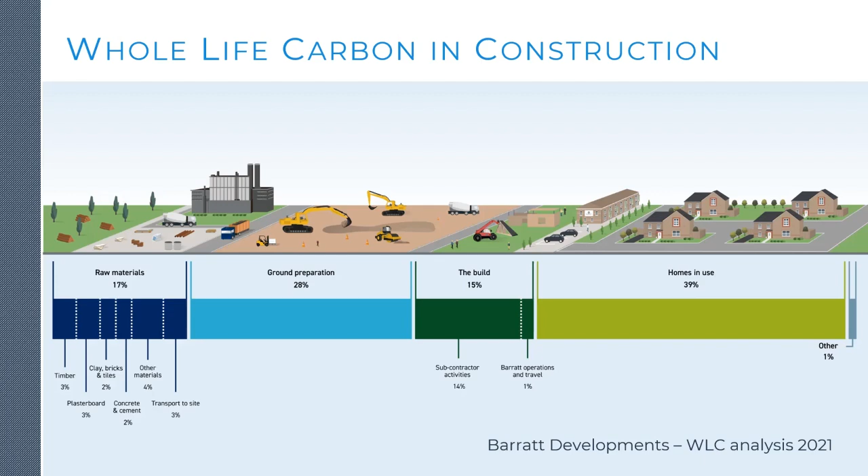That as an industry is where we should be focusing, but also on the carbon that's going to be used through the lifetime of that product as well. So hopefully that slide helps you understand the work we did with Barratt, to understand how you report data, how you find that data out from supply chains. We did a bit more work in my business too, trying to understand what traditional house builders and traditional main contractors are doing.

There's a lot of detail here, but in effect on the left hand side, organizations were making a public commitment to reduce carbon, but then we tried to go through and actually have a look at what that meant in reality. What were they actually asking for? What was interesting was the number of organizations actually including supply chain scope 3 in those targets. There's a lot of red crosses where they weren't including supply chain scope 3, and even fewer organizations looking at what you might call downstream scope 3 carbon.

Downstream is in effect the operational carbon of the building itself. To get a science-based target initiative, you need to include both your upstream, i.e. your supply chain, and your downstream scope 3. So we've got a lot of work to do with some of the major organisations, main house builders and main contractors, if they're really serious about tackling scope 3 and getting to that net zero situation.

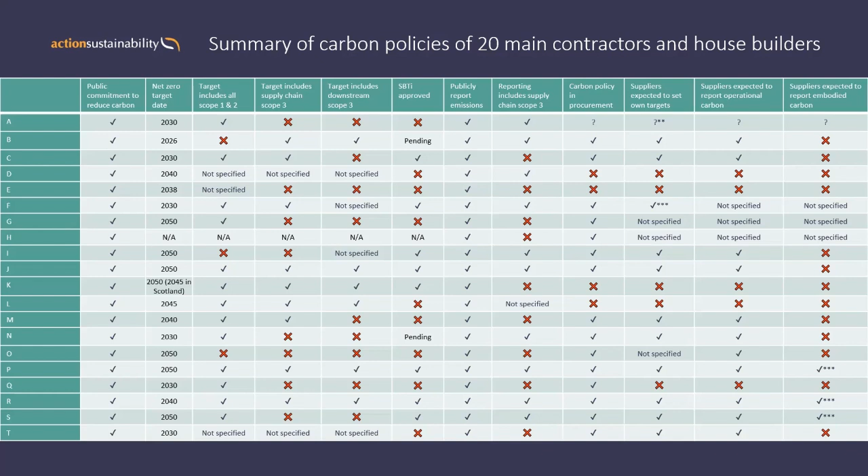A lot of detail in that, I don't intend to spend ages on it. But I'll now focus a little bit on embodied carbon, and thanks very much to HTA Design here, for example, who set out - many of you are familiar with the volumetric work which was done on George Street.

LETI set out those benchmarks for where we should be at 2020, 2025, and 2030 in terms of the amount of CO2 per square meter. And you can see there in terms of George Street where that's actually got to in terms of its performance. I think that's a really good place to see what the potential for our industry has to offer. But I would also flag up that when organizations look at this data, you've got to be careful about where that data actually comes from.

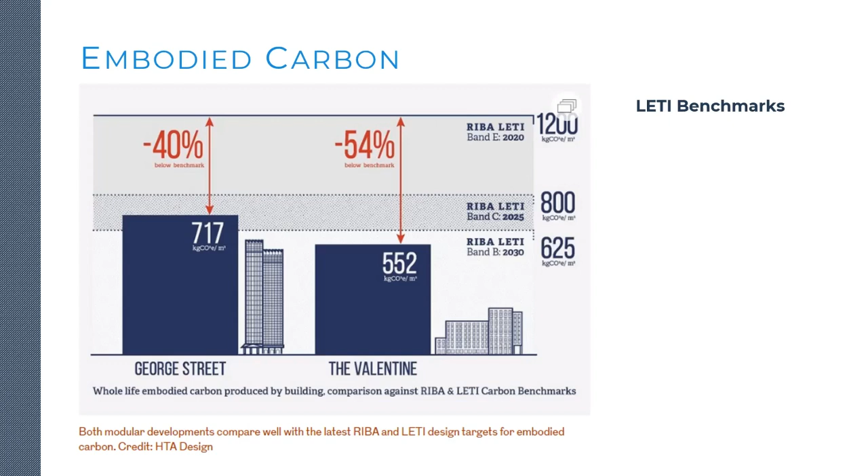Because when we're looking at embodied carbon data, some organizations use spend data, some use proxy data, and some use actual data. What do I mean by proxy data? For example, in the last example we saw, in actual fact we knew how many tons of steel were used, how many tons of glass were used, how many tons of the various materials used in the construction. But the calculation actually used proxy data because it was taken from the ICE database of embodied carbon in materials - it wasn't actually taken from the actual data from the materials which were bought.

And that's where we need to get to as an industry. Because from my experience, when we're looking at carbon, we need to be looking at the ability to design out carbon and also to procure out carbon as well. But to do that, we need actual data. Actual data can come from the materials or actually the supplier. So what is the carbon footprint of your supply chain? What is the carbon footprint of the actual materials that you're using? I think that's important for us to look at.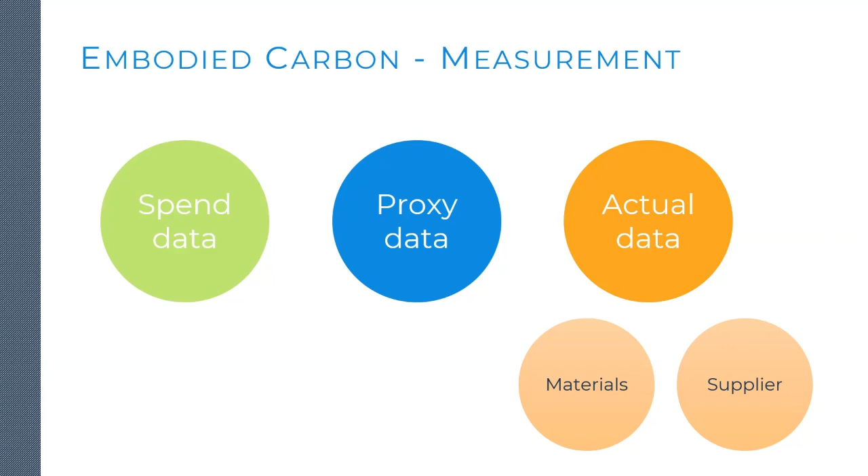So methodologies to calculate scope 3 - we can use spend analysis, which gives you a really good starting point. It's very approximate and of limited use, because unless you actually spend less, it doesn't make any difference at all if you optioneer between one type of concrete and another, for example.

You can use site or contract specific data, or you can use an apportionment methodology, which helps you, especially if you're using a series of suppliers on a regular basis, and you're looking for those suppliers to actually reduce their carbon going forward.

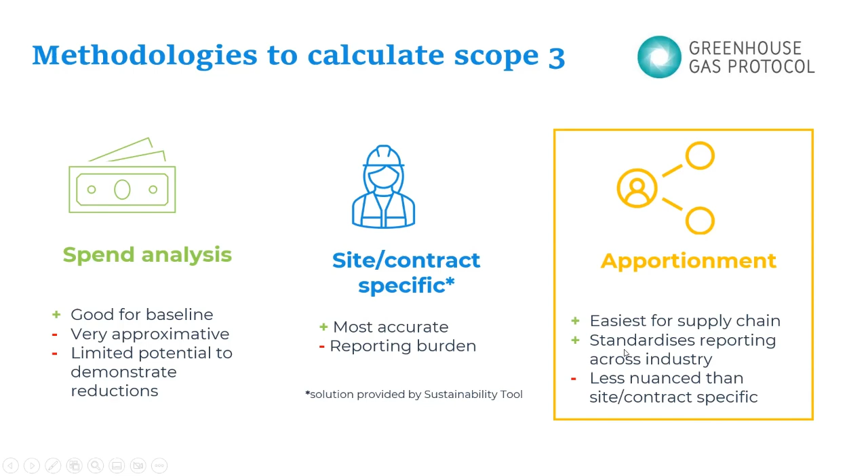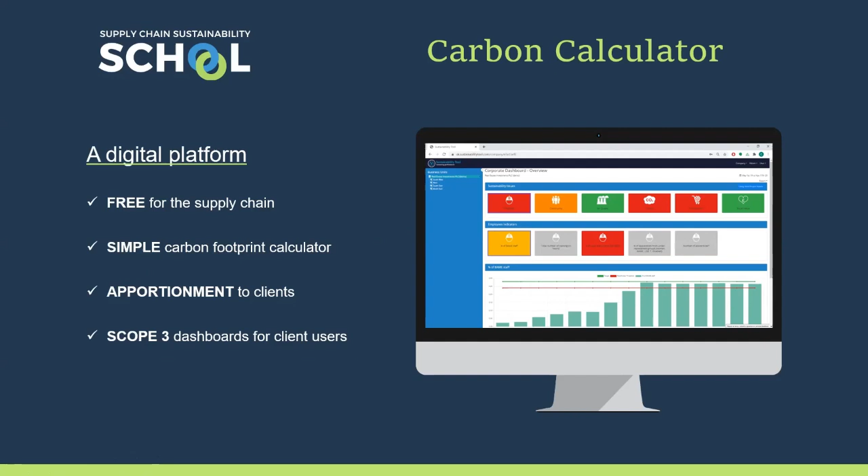In the Supply Chain School, we've got hundreds of partner organizations grappling with this point about their scope 3 emissions. So we developed something called the Carbon Calculator, a digital platform which enables major contractors and house builders to ask their suppliers what their carbon footprints are, and for them to report that in one place.

We launched this back in August 21. We now have 1,500 suppliers registered, and we've had 531 suppliers actually report their carbon through this. So this is actual carbon data being reported.

What we're looking for is to get up to the 1,500 of those suppliers to report their carbon on an annual basis. We want year-on-year reporting of that carbon to find out if the key suppliers we're using in this industry are actually reducing their carbon footprints or not.

So the Carbon Calculator is a freely available tool that we've said to actually use. Anybody on the call now can use that. Go to Supply Chain School, you can find links to it. You can use it to calculate your own carbon footprint.

And if you're supplying into any of the key contractors or house builders, you can actually apportion the amount of carbon in your organization into those key suppliers and key customers of yours.

There's quite a lot of functionality involved in the Carbon Calculator. It gives you lots of different types of reports, frequency reporting, apportionment data, data visualization. If you want to get all the data on your suppliers, there is a fee associated with that, but I think you'll find it's a very reasonable fee.

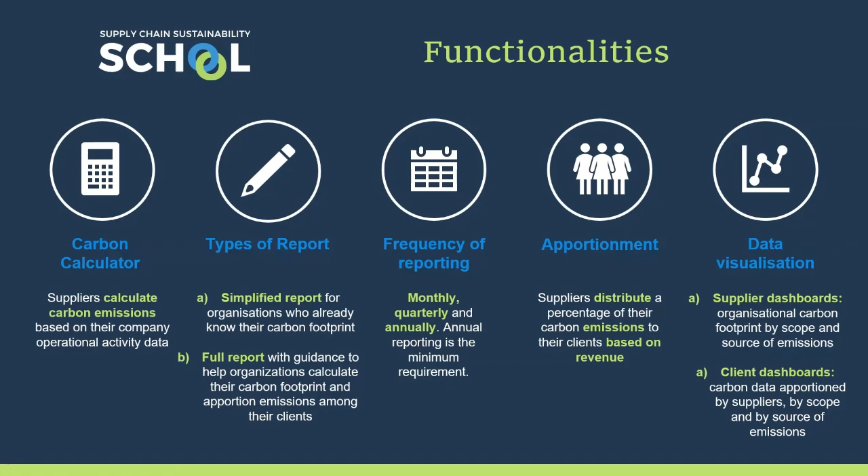So that's how to look at the upstream data - that's looking at what embodied carbon is in your supply chain. We also need to look at the operational carbon, and using the RICS whole life carbon assessment, we've already established that 31% to 39%, depending on whose methodology you look at, is the carbon in use.

The challenge for us in the offsite industry is how can we reduce the operational carbon of a building. If we're building better, if we're building modules which perform better and perform as they're designed, unlike traditional building, we should be able to significantly reduce that.

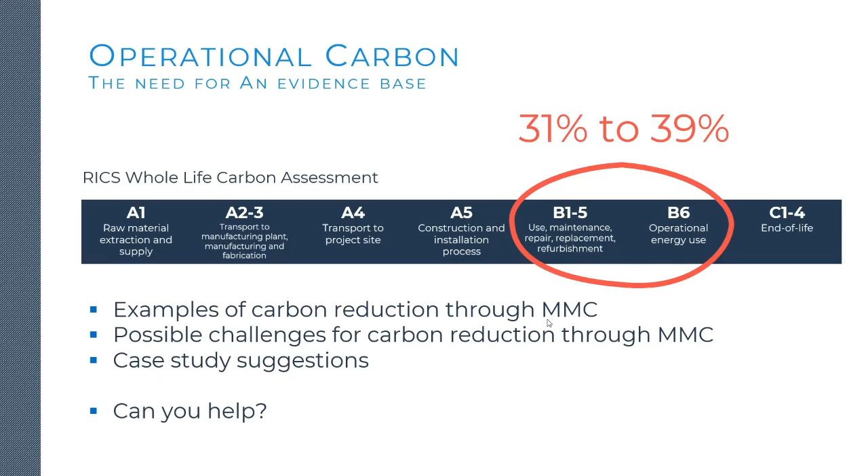But whilst I've seen ad hoc surveys, I don't see the actual evidence base. So one of the things my colleagues are doing is we're making a call for evidence right at the moment. Nigel and others on the call today are involved in that.

We're making a call for evidence to actually see what evidence exists in terms of whole life carbon in the embodied stage and in the operational stage. So if we're using offsite and modern methods of construction to build better, are those buildings performing as designed, and are they performing better than traditional build?

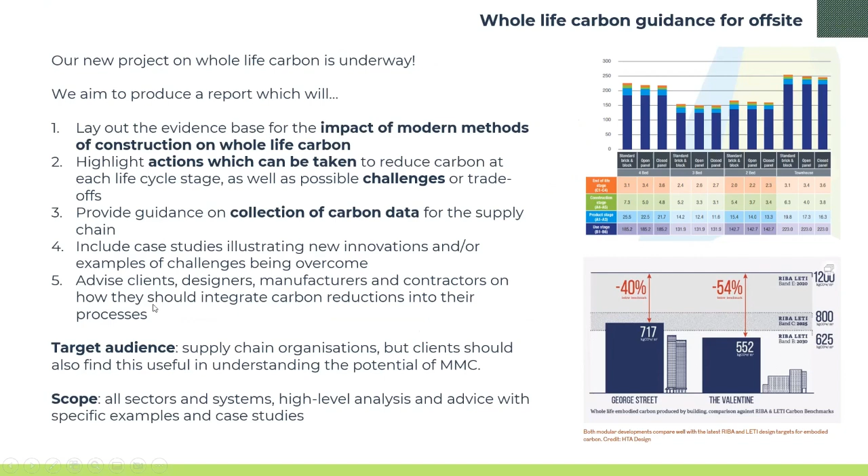We need to get the evidence base to do that, and I'd like to invite you all to get involved in that process we're doing at the moment. As you can see, we're hoping to produce some guidance documents by the end of March next year.

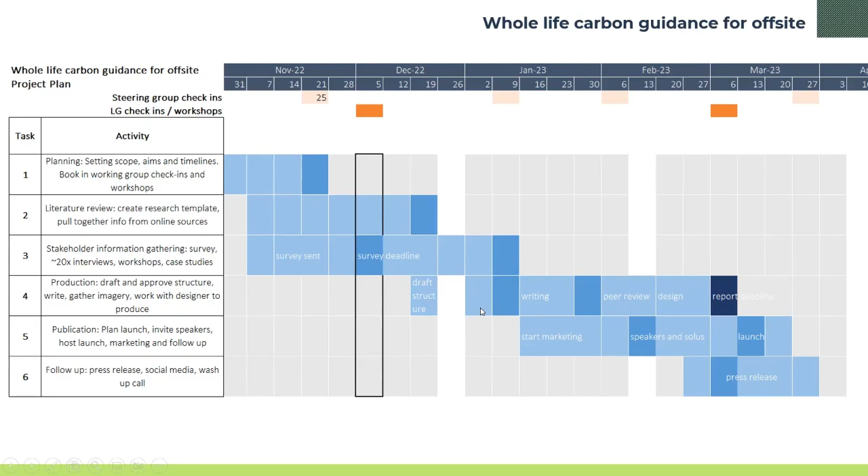So that's me finished, very whirlwind. In summary, if you're interested in calculating the carbon of your own organization or your supply chain, go and have a look at the Carbon Calculator. If you're interested in helping us understand how the offsite industry and MMC can improve the performance of the built environment going forward, please get involved in the study my colleague Naomi is doing. Thank you very much for your time, and back to you, Kat.